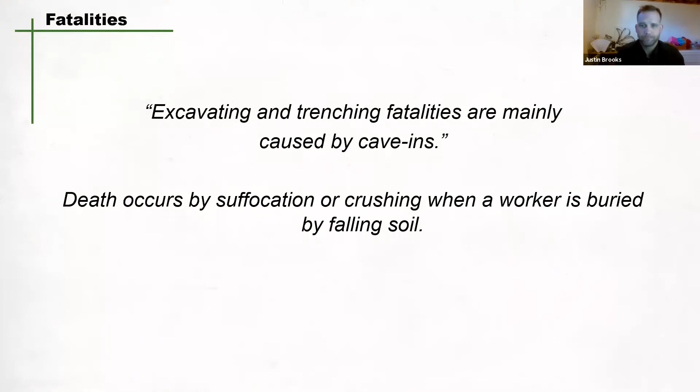Excavating and trenching fatalities are mainly caused by cave-ins. Death occurs by suffocation or crushing when a worker is buried by falling soil. Working around excavations and trenches can be highly hazardous without the proper training or controls in place.

Main causes of lost time injuries on excavating and trenching projects include material falling into the excavation or trench, slips and falls as workers climb on and off equipment, unloading pipe, handling and placing frames and covers for manholes and catch basins, handling and placing pipe and other materials, being struck by moving equipment, falls as workers climb in and out of an excavation or trench, falling over equipment or excavated material, falling into the excavation or trench, and exposure to toxic, irritating, or flammable gases.

So when working around an excavation and trenching, it's very important to plan ahead, always be alert, and to take extra precautions to avoid being faced with one of these situations.

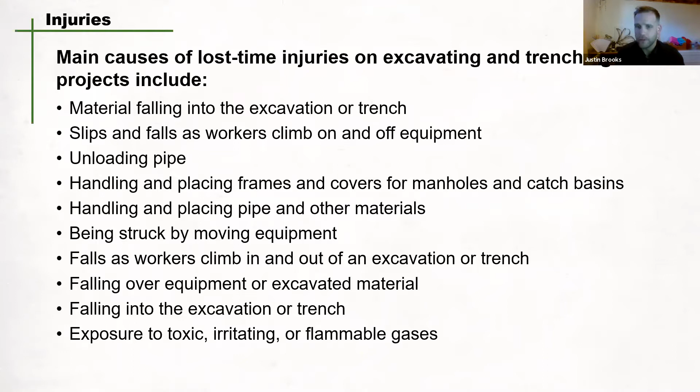When working around excavations and trenches, it's important that you become familiar with the parts of the Act and regulations: excavations, trench, tunnels, and excavated shafts.

Before moving on, let's look at the definitions for excavations and trenches. An excavation is any dugout area of ground other than a trench, tunnel, or excavated shaft.

Working around excavations can be risky as it could result in cave-ins. A trench is an excavation that is deeper than it is wide, and a tunnel is an underground passage with an incline of 45 degrees or less from the horizontal.

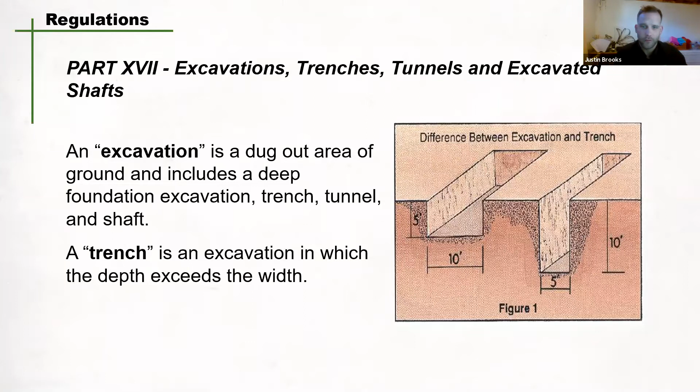Other important regulations you should be familiar with include Section 260, excavations and trenches. This identifies the various types of protection around excavations and trenches. Some forms of protection include shoring, sloping, temporary protective structures, etc.

The OHS division shall be notified as soon as reasonably possible of the intent to dig an excavation, trench, or excavated shaft that is more than 5 meters deep, and that a worker will be required or permitted to enter. That's in Section 7(1)(b). Legislation states that an engineering certificate is required when excavating or trenching using shoring, bracing, and temporary protective structures. It's in Section 261.

Prior to any excavation or trenching, a safe job procedure must be developed and implemented, and all workers must be trained. This is in section 19. We'll go over this at the end, but our next toolbox talk is on developing procedures, so if you're having trouble, contact advisory services and tune into that talk.

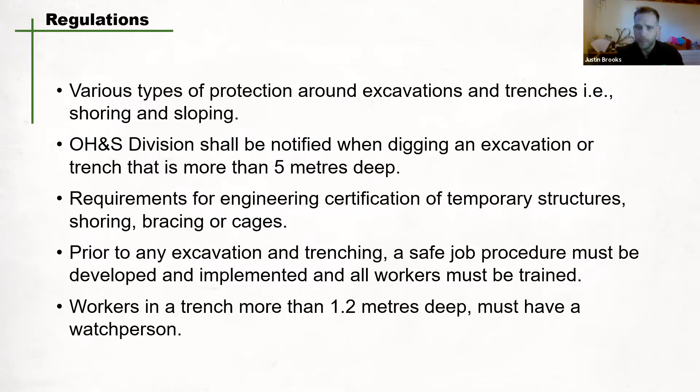Protection against cave-in trenches, subsection 5, indicates where a worker is working in a trench more than 1.2 meters deep, a competent worker must be stationed at the surface to alert the worker in the trench about the development of potential unsafe conditions and to provide assistance in the event of an emergency. This is in section 263.

So let's go over the cause of cave-ins. A cave-in is a collapse of an excavation. When working around excavations and trenches, one of the biggest hazards is risk of cave-ins. An unstable trench or excavation can collapse, resulting in injured workers, or worst case fatalities, caused by suffocation or worker being crushed when buried by soil.

To put this into perspective, 1 cubic yard can weigh as much as a half-ton truck, approximately 2,500 to 4,000 pounds. Soil properties often vary from the top to the bottom and along the length of the trench.

Many factors such as cracks, water, vibration, weather, and previous excavations can affect trench stability, potentially leading to cave-ins. Traffic and equipment working around the excavation or trench can also lead to cave-ins.

Most fatal cave-ins occur on small jobs of short duration, such as service connections and excavations for drains and wells. Too often, people think these jobs are not hazardous enough to require safeguards against a collapse. Unless the walls are solid rock, never enter a trench deeper than 1.2 meters, 4 feet, if it is not properly sloped, shored, or protected by a trench box.

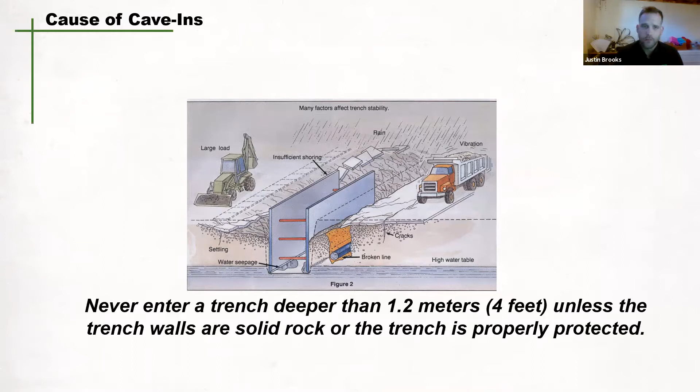Time is also a critical factor when working with excavations and trenches. Some trenches will remain open for a long period, and suddenly collapse for no apparent reason. This figure shows the typical cause of cave-ins.

So the main factors that affect excavation and trench stability are soil type, moisture, vibration, surcharge, previous excavation, existing water, existing foundations, and the weather.

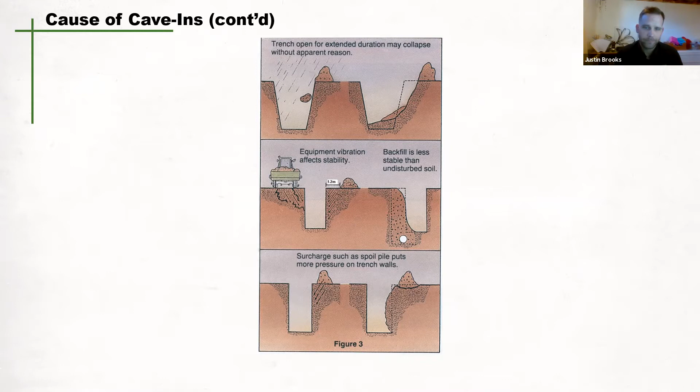Before considering excavating and trenching, you should consider the soil type. Type of soil determines the strength and stability of trench walls. Identifying soil types requires knowledge, skill, and experience. In other words, a competent person shall be responsible for inspecting and identifying the soil.

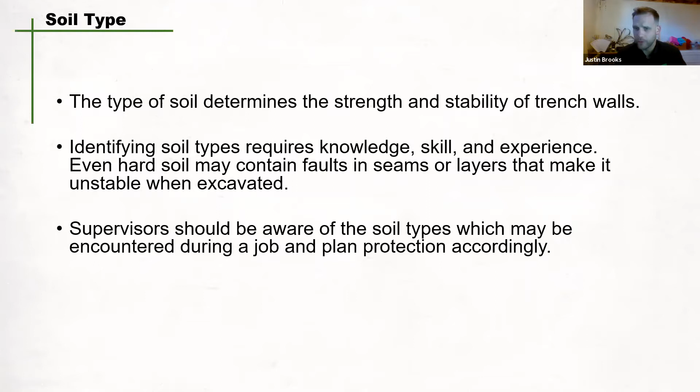This is important because even hard soil may contain faults in seams or layers and make it unstable when excavated. Types of soils are defined under Regulation 257, Section E, F, G, and H, which we will cover shortly. Supervisors should be aware of the soil types which may be encountered during a job and plan protection accordingly.

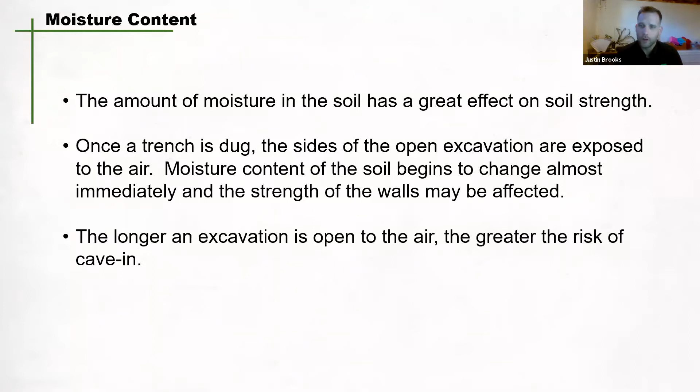The moisture content in soil can have a great effect on the strength of the soil. Once a trench is dug, the sides of the open excavation are exposed to the air. Moisture content of soil begins to change almost immediately, and the strength of the walls may be affected. The longer the excavation is exposed to the air, the greater the risk of cave-ins.

Vibration from various sources can affect excavation and trench stability. Often, excavation and trench walls are subject to vibration from vehicular traffic or from construction operations such as earth moving, compaction, pile driving, and blasting. These can all contribute to the collapse of trench walls.

For anybody that's been around heavy track vehicles or pieces of equipment like excavators, you can feel the vibration in the ground. So that vibration is obviously moving through these trenches and can definitely, without a doubt, cause collapses.

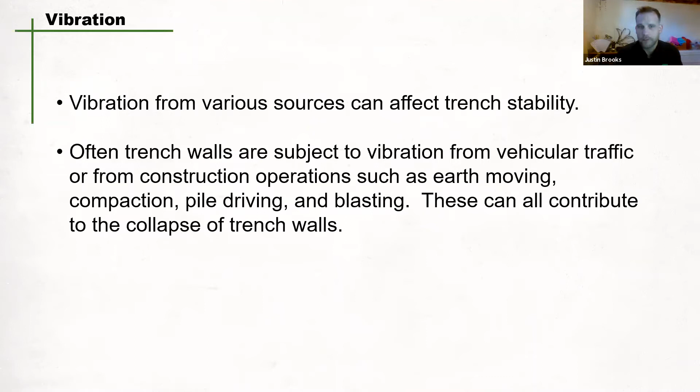A surcharge is an excessive load or weight that can affect the stability of an excavation or trench. For instance, excavated soil piled next to the trench can exert pressure on the walls. Therefore, placement of spoil piles is very important. Spoil piles should be kept as far as practical away from the edge of the excavation or trench.

Mobile equipment and other materials stored close to the trench also add a surcharge that will affect trench stability. Spoil pile is defined by Section 257C of the regs, which states a spoil pile is material excavated from an excavation, trench, tunnel, or excavated shaft.

This brings an important thing to mind: even when setting rings for catch basins, some companies have used skid steers, and skid steers get too close to the trench. So it's important to plan ahead for the type of equipment you use, like, for example, a telehandler or a zoom boom, that can actually bring those rings and drop them over the trench from a distance.

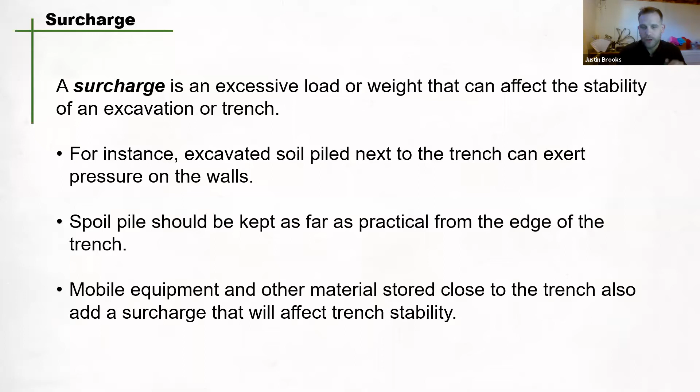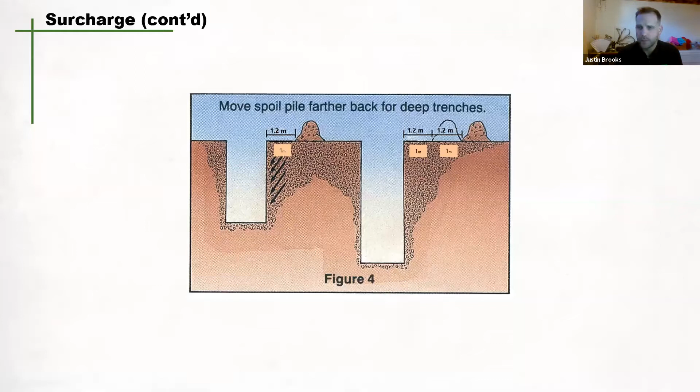In accordance with regulation section 260C, spoil piles should be kept at a minimum of 1 meter, 3 feet, from the edge of an excavation or trench. This also applies to equipment, rocks, and construction material. This distance should be greater for deeper trenches.

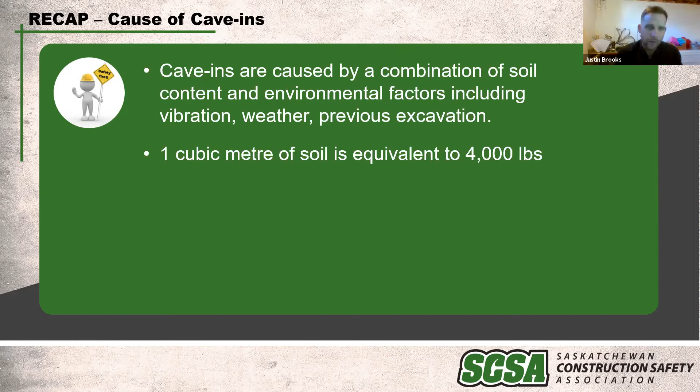So cave-ins are caused by a combination of soil content and environmental factors, including vibration, weather, and previous excavation. 1 cubic meter of soil is equivalent to 4,000 pounds, so that's a good thing to remember and keep in the memory bank of how much this weighs. Spoil piles are material excavated from trenches, tunnels, etc., and spoil piles must be kept at a minimum of 1 meter, 3 feet, from the excavation.

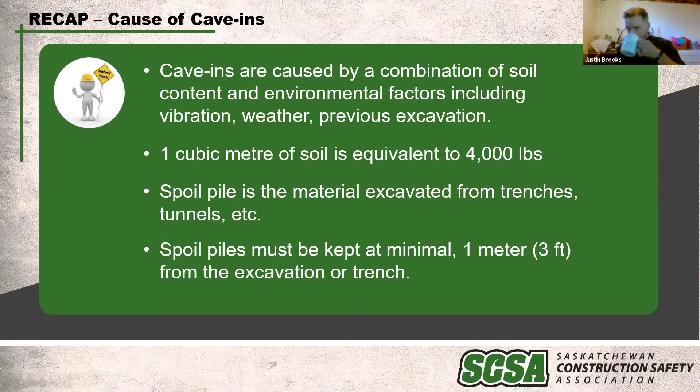All right, so protection against cave-ins. Providing my internet is working great, I've got a video coming up next here from WorkSafe BC. So let's see how this works.

I took a job working in basically golf course construction, something I hadn't dealt with before. Everything I had been doing wasn't related to the construction industry. I moved into a role where I was capable of doing everything from running a shovel to driving a dump truck, running an excavator, running a bulldozer.

We started that morning running a ditch. Everything started off according to plan before coffee break, and we came back from coffee break and went back to work, and within 10 minutes the accident occurred.

We all basically noticed at the same time that one side of the bank looked a little bit unsteady. So I was actually in the process of getting out of the trench. Without even seeing it, the whole wall of the trench just came down.

Because I had my back turned, it basically got me on the back and the side, my right side. And the impact pushed me up against the other side of the trench and pinned me there.

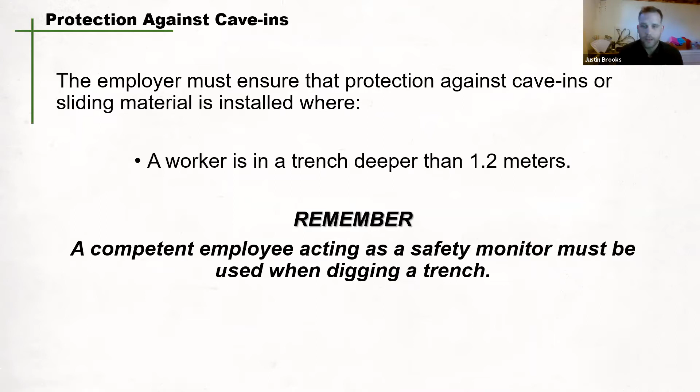In Saskatchewan, there are 3 basic methods of protecting workers against trench cave-ins: cutback, shoring, and temporary protective structures. Sloping technique is used to employ a specific angle of incline to the sides of an excavation to protect against cave-ins. Cutting back the slope of trench walls is a way to protect against cave-ins, basically. The slope angle required may vary depending on soil conditions, so a competent person must determine the correct slope angle for each situation.

Temporary protective structures are a structure or device in an excavation, trench, tunnel, or excavated shaft that is designed by an engineer. The structure provides protection from cave-ins, collapse, and sliding or rolling material. Types of structures include shoring, trench boxes, trench shields, and similar structures. We're going to cover shoring and trench boxes.

Shoring prevents movement of soil, underground utilities, roadways, and foundations. It's a process of bracing the walls of a trench in order to prevent collapse or falling earth into an excavation. Traditional wooden braces, hydraulic rams, or pneumatic rams can be used. An engineer is required to certify that a design of shoring is safe. Shoring for temporary structures must be made of number 1 structural grade spruce lumber.

The OH&S regulations outline shoring procedures that must be followed. Those are within Regulation 262 and Table 17, and we'll show you a little bit of that coming up here. Dimensions for excavation and trench shoring is the title of that.

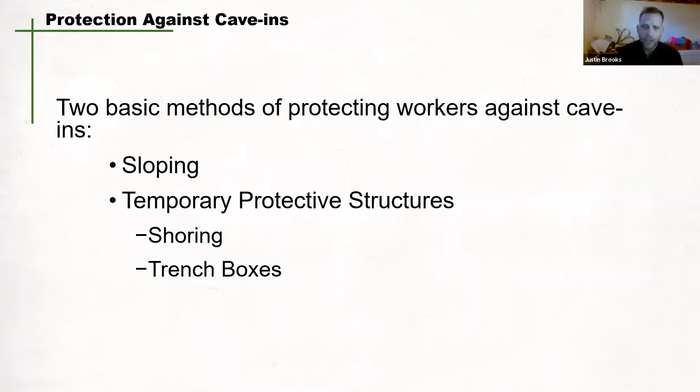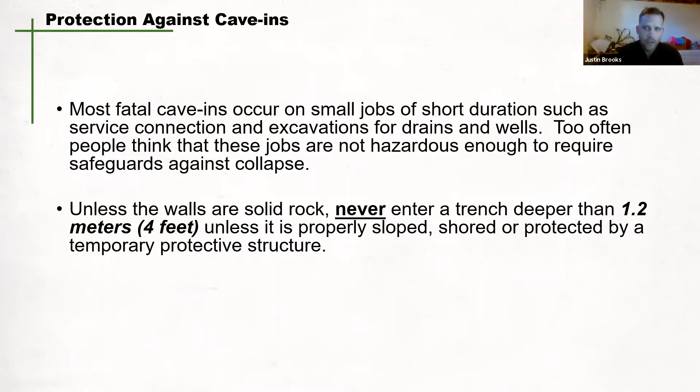Most fatal cave-ins occur on small jobs of short duration. We kind of covered that earlier. Those are usually generally with service connections and excavations for drains and wells. Too often people think that these are not very hazardous and they skip the safeguarding process. So again, unless those walls are solid rock, never enter a trench deeper than 1.2 meters unless it's properly sloped, shored, or protected by a temporary protective structure. That comes up a few times because it's extremely important that it's followed.

One way to ensure that a trench will not collapse is to slope walls. Where space and other requirements permit sloping, the angle of the slope depends on soil conditions. Cut the trench walls back at an angle of 1 to 1, so 45 degrees - that's 1 meter back for every 1 meter up. Walls should be sloped within 1 meter, 3 feet, of the trench bottom.

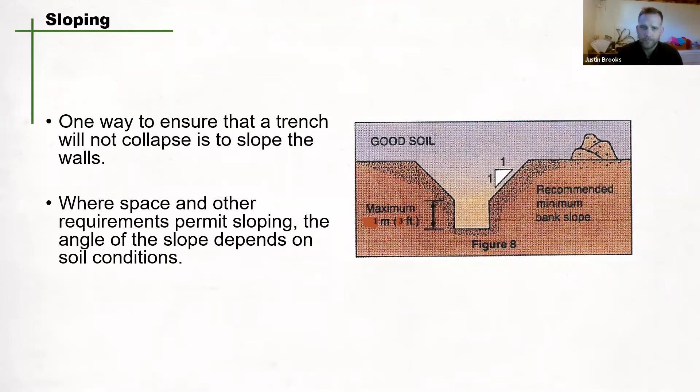The Saskatchewan OH&S regulations identify 4 types of soil, categorized as most closely exhibiting the characteristics within section 257, subsections E, F, G, and H. Type 1 soil is hard in consistency, very dense and compactive condition, can be penetrated but only with difficulty by a small, sharp object. It has a dry appearance, no signs of water seepage, and can be excavated only by mechanical equipment. Type 1 soil does not include previously excavated soils.

Type 2 soil is very stiff in consistency, dense in compactive condition, and can be penetrated with moderate difficulty by small, sharp objects. It has low to medium natural moisture content and a damp appearance after it's excavated. It is difficult to excavate with hand tools, has no signs of water seepage, and does not include previously excavated soils.

Both type 1 and type 2 soil must be sloped within 1.2 meters, 4 feet, of the bottom of the excavation or trench, with a slope angle not steeper than one horizontal to one vertical, at 45 degrees measured from the horizontal. So that's, again, type 1 and type 2 soil.

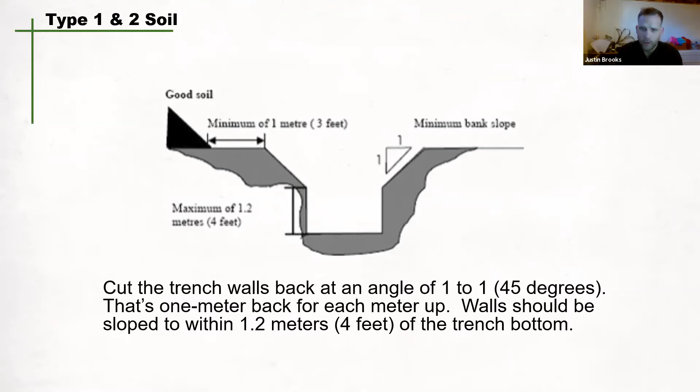Type 3 soil is very stiff in consistency, compact in compactive condition, and can be penetrated with moderate ease by a small, sharp object. It is moderately difficult to excavate with hand tools and exhibits signs of surface cracking. It shows signs of localized water seepage, or is previously excavated soil that does not exhibit any of the characteristics of type 4 soil. This type of soil must be sloped from the bottom of the excavation or trench at an angle not steeper than one horizontal to one vertical, or 45 degrees measured from the horizontal.

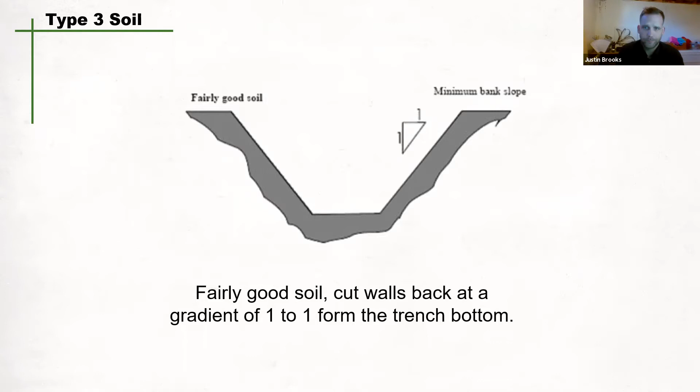Type 4 soil is soil that has been either previously excavated or is undisturbed soil that has any of the following characteristics. It's very soft in consistency, loose to very loose in compactive condition, and is easy to excavate with hand tools. It's a cohesive soil that is sensitive and, on disturbance, is significantly reduced in internal strength and is dry and runs easily into a well-defined conical pile.

It has a wet appearance and runs easily or flows, and is granular soil below the water table unless the soil has been dewatered. This type of soil must be sloped from the bottom of the excavation or trench with a slope at an angle not steeper than 3 horizontal to 1 vertical, or 19 degrees measured from the horizontal. This again is within section 262C.

Where the soil is identified as consisting of more than one soil type, the soil will be classified as a soil type with the higher number. So, for clarification, if it was type 2 and then you found out as well soil type 3, it would be classified completely across the board as a soil type 3.

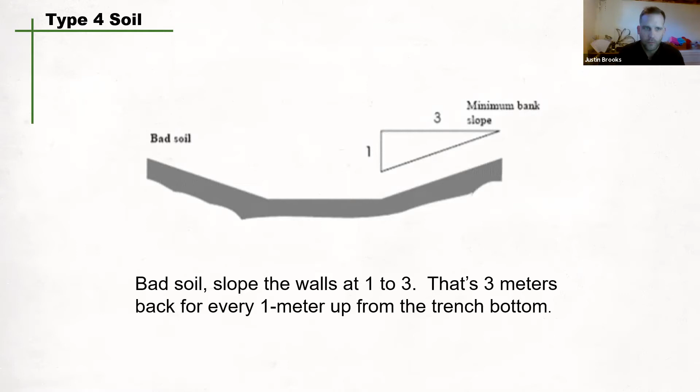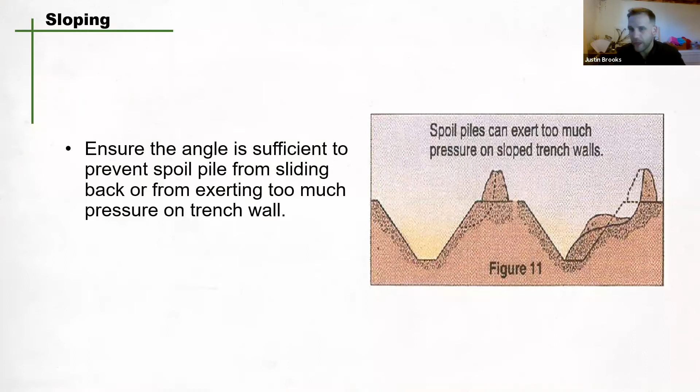Although sloping can reduce the risk of cave-ins, the angle must be sufficient to prevent spoil not only from sliding back, but from exerting too much pressure on the trench wall.

Sloping is commonly used with shoring or temporary protective structures, or trench boxes, to cut back any soil above the protection zone. It's also good practice to cut a bench at the top of the shoring or trench when the depth of the excavation below the slope sides exceeds 1 meter, 3 feet. The support structure should extend 2 feet above the bottom of the slope sides to prevent any material from falling into the excavation. This is within regulation 262(1)C.

So as you can see in the picture, how they cut the bench in from the top of where the shoring is, and that shoring extended above, right? So this can also save material doing this bench cut above the trench, right? Because now if you have to go by regulations 2 feet above the bottom of the slope sides, you're saving material because you've had to dig that bench out as well. So it's also good for the pocketbook, I guess, this regulation.

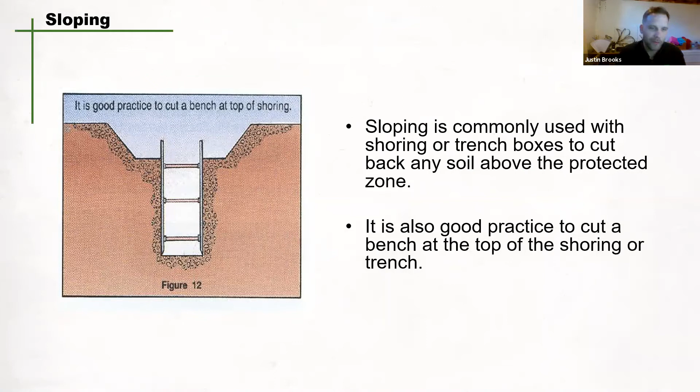Where sloping is to be used above the temporary protective structure or trench box, the box portion of the cut should be first sloped at a 1-to-1 ratio. Then the box should be lowered into the trench.

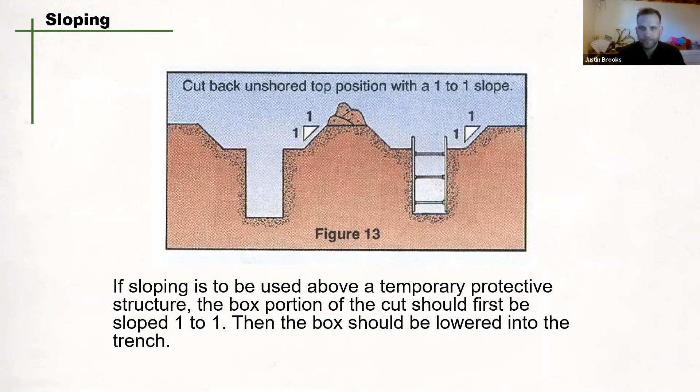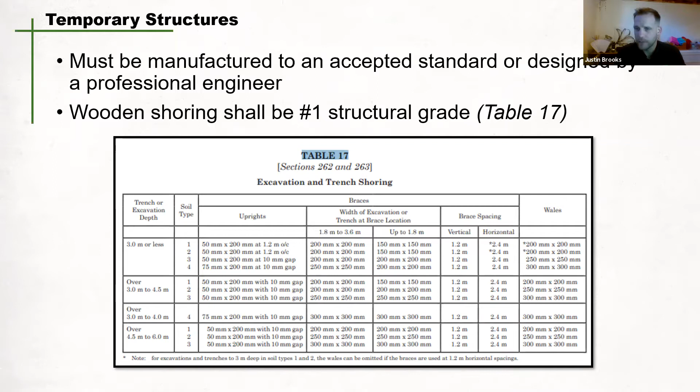Wooden shoring shall be number 1 structural grade spruce or equivalent and installed as set out in table 17 of the OH&S regulations appendix.

Temporary protective structures such as trench boxes are not usually intended to shore up or otherwise support trench walls. They're meant to protect workers in case of cave-ins. They are capable of supporting trench walls if the space between the box and the trench wall is backfilled. The protective structure should exceed at least 300 millimeters, so that's 1 foot, above the excavation. That's also located in regulation 262(1)C.

Trench boxes are normally placed in an excavated but unshored trench and used to protect personnel. A properly designed structure is capable of withstanding the maximum lateral load expected at a given depth in a particular soil condition. Trench boxes are commonly used in open areas. Trenches near utilities, streets, and buildings may require a shoring system.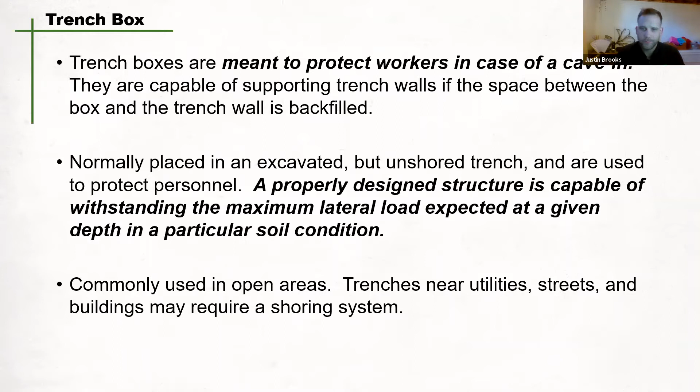As mentioned earlier, trench boxes primarily protect workers from cave-ins and similar situations. They act as a shield and are commonly used in open areas away from utilities, roadways, and foundations. Designed by an engineer, they protect workers from cave-ins, collapse, and sliding or rolling material.

Excavation should be done so that the space between the trench box and the excavation is minimized. This may require some backfilling. Two reasons for this are allowing closer access to the top of the box, and limiting soil movements in case of a cave-in.

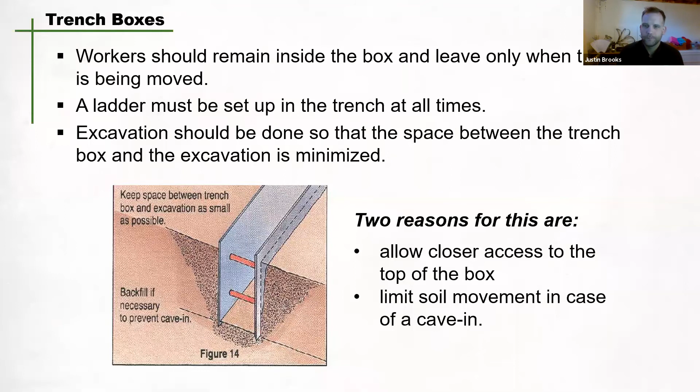Shoring is a system which shores up or supports a trench wall to prevent movement of soil, underground utilities, roadways, and foundations. Shoring should not be confused with trench boxes. A trench box provides worker safety but gives little to no support to the trench walls or existing structures such as foundations and manholes. The two types of shoring most commonly used are timber and hydraulic.

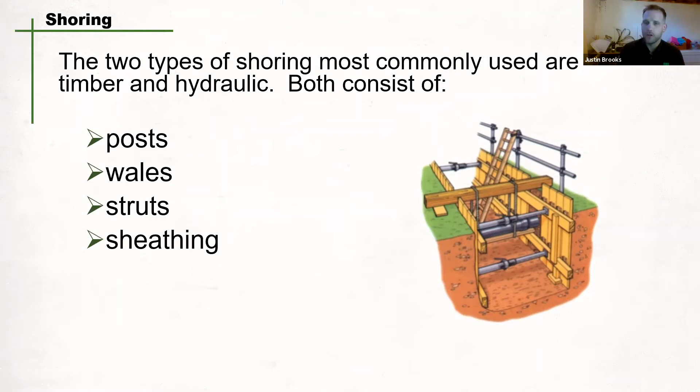As these pieces go together, your sheathing is actually up against the excavated area. Your walers go across to help spread the load placed by the struts, or cross braces, that are pushing against each side of the trench wall. This would be on both sides of the trench wall, as seen in some of the previous photos. It's really important that they follow all regulations set out, and that they're placed securely but also in a manner that allows workers to move safely in between.

The reason it's so important to make sure these are secured is because workers will be working in that area, and the last thing you need is someone bumping one of the struts. I hope nobody decides to sit and eat their lunch in an excavation. Definitely don't use the struts or walers to step up - that's why you have your ladders. They shouldn't be sat on, have material placed on them, or anything, because they are holding weight when required.

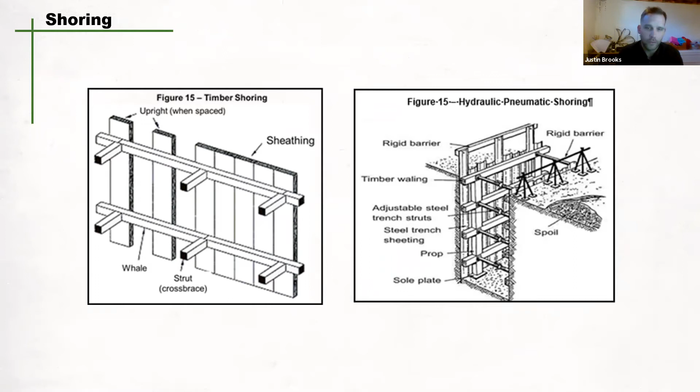Timber sheet supported with the help of timber posts - this is a basic type of temporary shoring used. This is just a basic up close view, so you get a good idea of what it looks like and how it's laid out.

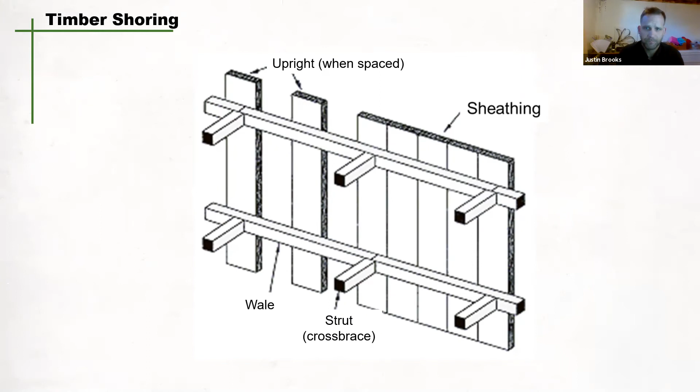Hydraulic shoring includes the use of prefabricated strut and wale systems manufactured of aluminum or steel. Strictly speaking, these may not operate hydraulically - some are air operated or manually jacked. One major advantage of hydraulic shoring over some applications of timber shoring is safety during installation. Workers don't have to enter the trench to install the system; installation can be done from the top of the trench. These are really handy - they're not cheap, but they are extremely handy. If you've ever had the chance to see them operate, they're amazing.

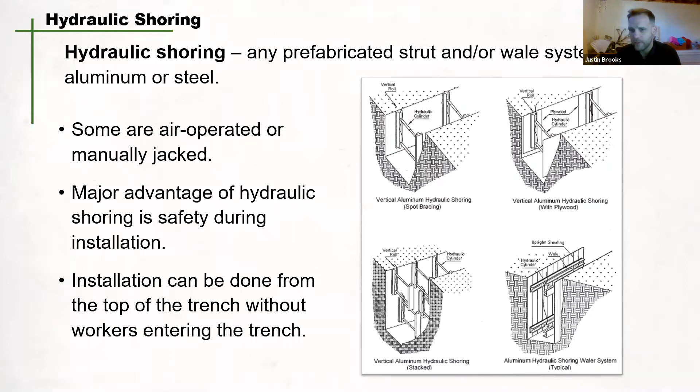Other advantages of most hydraulic systems are that they're light enough to be installed by one worker, are gauge regulated to ensure even distribution of pressure along the trench line. They can have their trench faces preloaded to use the soil's natural cohesion to prevent movement, and can be adapted easily to various trench depths and widths. Hydraulic shoring should be checked at least once per shift for leaking hoses and/or cylinders, broken connections, bent bases, or any damaged or defective part.

Another form of shoring is pneumatic shoring, which is very similar to hydraulic shoring. The primary difference is that pneumatic shoring uses air pressure in place of hydraulic pressure. A disadvantage of using pneumatic shoring is that the air compressor must be available on site.

I'll just give you a second to take a look at how this is put together - very similar to the last pictures. It's just that your struts have been changed out for pneumatic or hydraulic jacks. There are different plates that go with it, like the sole plate you can see here. But it's very, very similar - it's just all prefabricated.

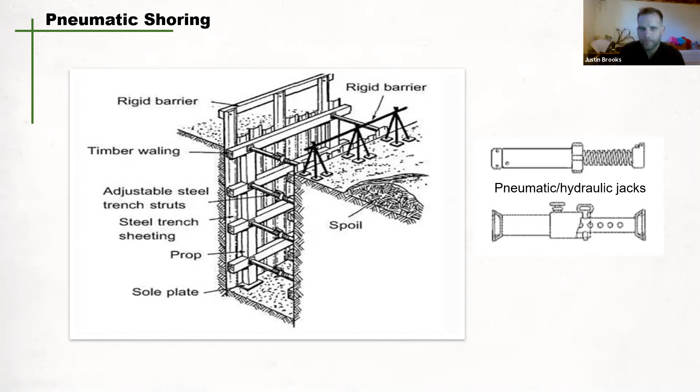Most hydraulic systems are light enough to be installed by one worker, gauge regulated to ensure the even distribution of pressure along the trench line, and easily adapted to suit various trench depths and widths. Whenever possible, shoring should be installed as excavation proceeds. If there's a delay between digging and shoring, no one must be allowed to enter the unprotected trench. All shoring should be installed from the top down and removed from the bottom up.

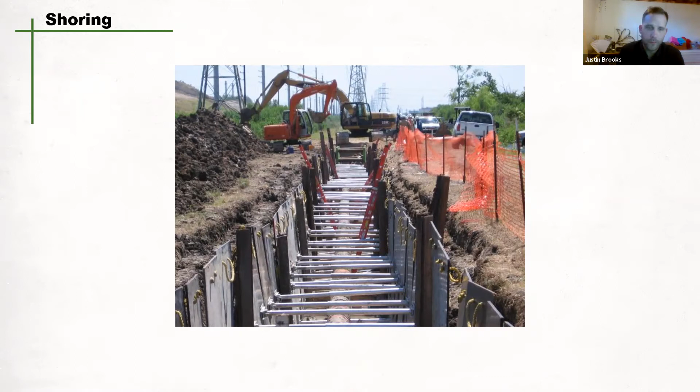Whether protected by sloping, boxes, or shoring, where workers are required to enter and work in a trench, there must be a safe means of entry and exit within close proximity. In accordance with legislation, section 2636, entry and exit must be within 8 meters, 26 feet, of the worker. Entries and exits include ladders, stairways, and sloped ramps. When using a ladder to prevent slipping, the ladder should be placed within the shored area and tied off.

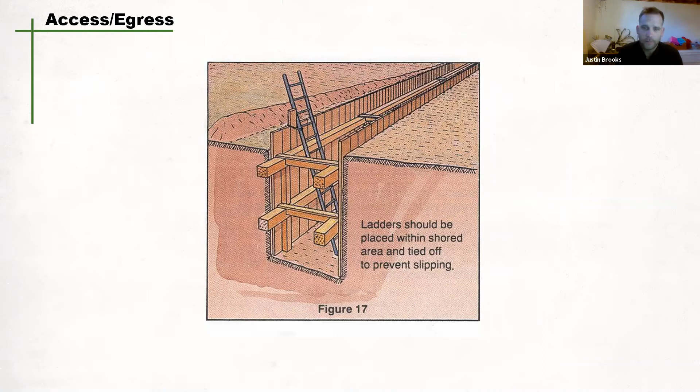Place ladders within the area protected by the shoring or trench box. They should be securely tied off at the top, extended above the shoring box by at least 1 meter, 3 feet, and inspected regularly for damage. For more information on inspecting a ladder, get in contact with an advisor to talk more about our ladder demonstration, which we can conduct over all our mediums, such as Zoom or Teams or anything like that.

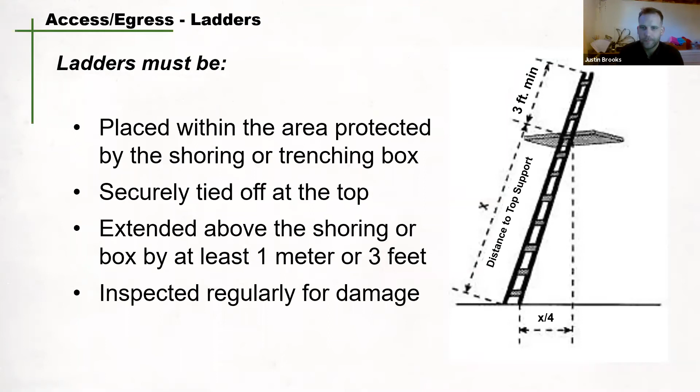In Regulation 2636AB, protection against cave-ins of trenches, safe entries and exits from a trench are very important. Ladders, stairways, or ramps should be placed no further than 8 meters from a worker in a trench deeper than 1.2 meters. Anyone climbing up or down must face the ladder and maintain 3-point contact.

Maintaining 3-point contact means hands must be free for climbing. Tools and materials should not be carried up or down ladders.

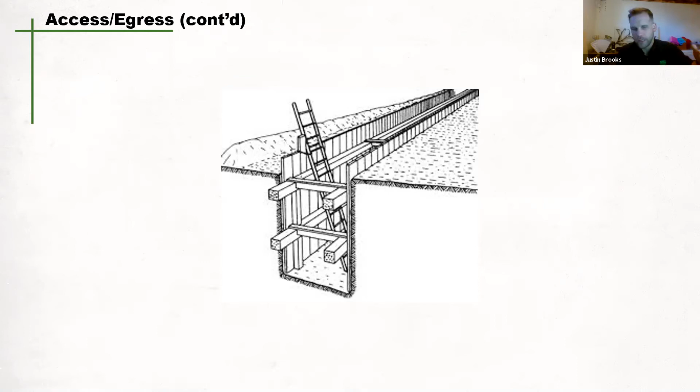Pumps, small compactors, and other equipment should be lifted and lowered by methods that prevent injury from overexertion and falling objects. This is why it's great to have a telehandler on site when it's available. If you have compactors to bring into the bottom of the trench, you can simply boom out, put your outriggers down, and using a nice long sling, drop it safely into the trench.

When it comes to inspection, remember that it's everybody's responsibility. Whether the protective system used should be inspected regularly. Check hydraulic shoring for leaks in hoses and cylinders, bent bases, broken or cracked nipples, or other damaged or defective parts.

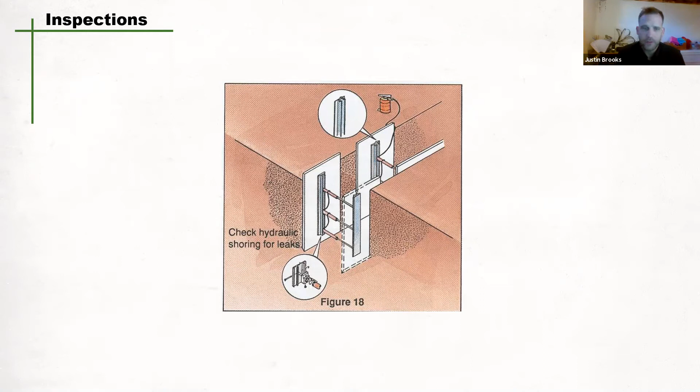Make sure that you're checking timber shoring prior to installation, like checking the actual timber itself too. Discard damaged or defective lumber. After installation, inspect wales for signs of crushing. Crushing indicates structural inadequacy and calls for more struts.

You can see in this picture how they've secured this with some strapping, like a 1x4 or 1x6, nailed to your wales from your struts. That's a great way, instead of just toe nailing, where you're just nailing through the sides of it. That's a much better way for doing it.

I've seen people that use brackets. They use 2 L brackets on the side and then 1 flat bracket on top to make sure it's secure properly and it's not going to move anywhere.

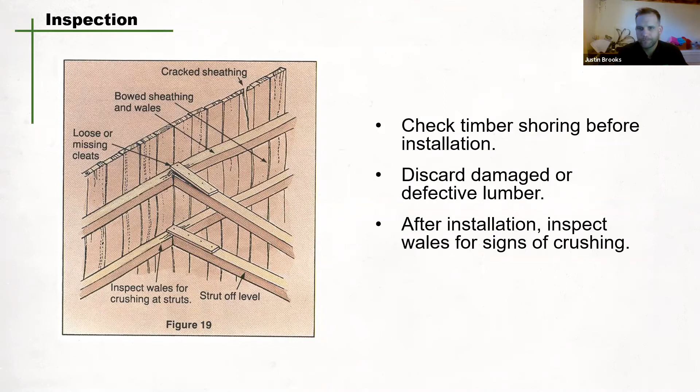These boxes should be inspected for structural damage, cracks in welds, and other defects. During use, check the box regularly and often to make sure that it is not shifting or settling much more on one side than the other. If it is, workers must leave the trench and ask the supervisor to check stability.

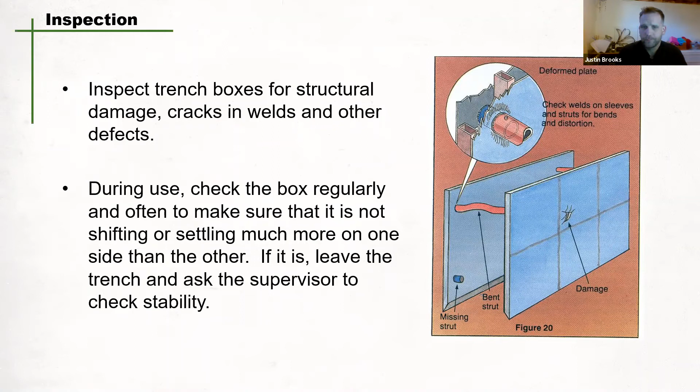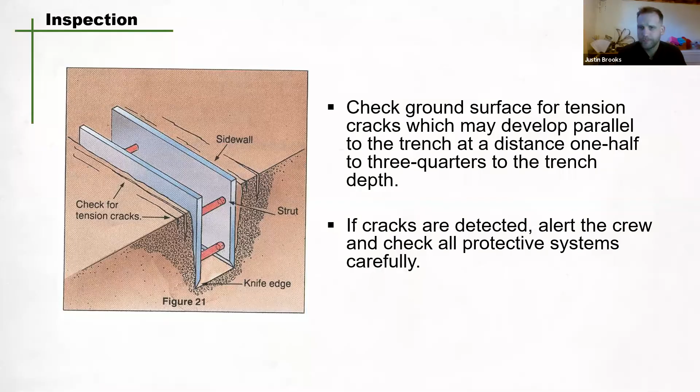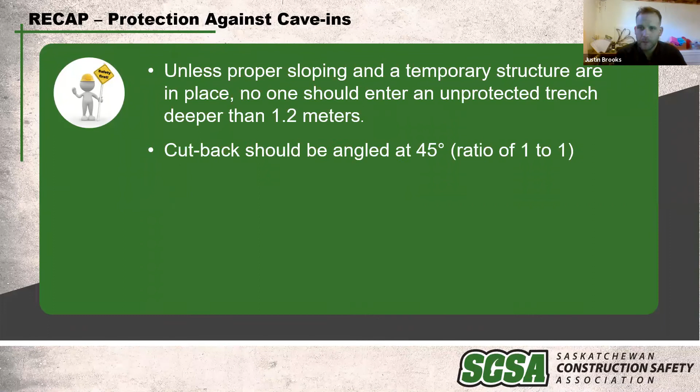So just a quick recap on protection against cave-ins. Unless proper sloping and temporary structures are in place, no one should enter an unprotected trench deeper than 1.2 meters. Cutback should be angled at 45 degrees, ratio 1:1. Type 4 soil is the least stable soil, and it is easy to excavate with hand tools and may have previously been excavated.

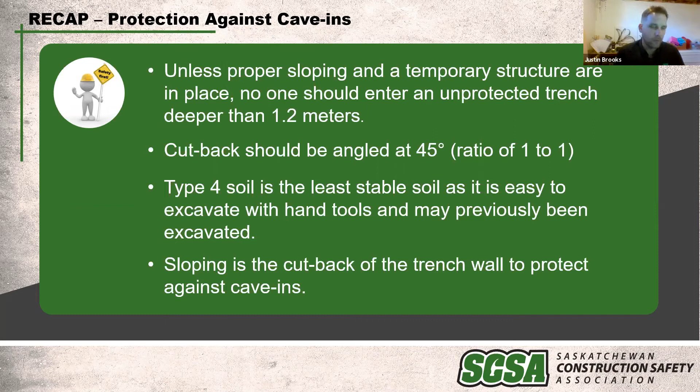Sloping is the cutback of the trench wall to protect against cave-ins. Keep in mind, type 4 soil is the soil that requires a different cutback. So, other hazards and safeguards.

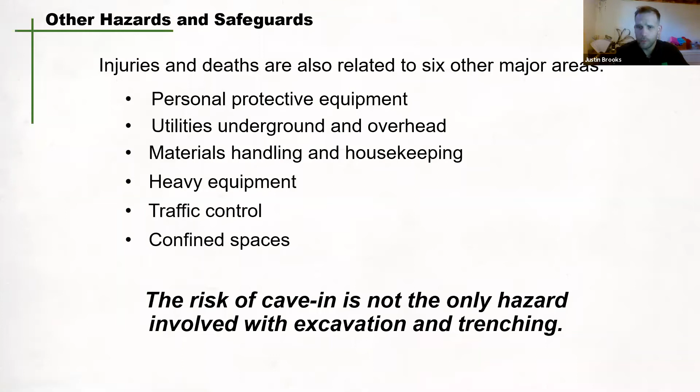Working around excavation and trenching also requires consideration of the following: PPE, personal protective equipment, utilities underground and overhead, materials handling and housekeeping, heavy equipment, traffic control, confined spaces. Injuries and deaths have resulted in the failure to acknowledge or recognize the importance behind pre-planning to ensure these major areas are accounted for. We'll be focusing on PPE and utilities, underground and overhead, today.

Wearing high visibility safety apparel, so vests, protects workers who are exposed to the risk of injury from moving equipment or environmental conditions so they don't blend in with the surroundings. It's extremely easy when everybody's wearing brown Carhartts and Carhartt long sleeves and toques and stuff like that. When you're on a job, it's very easy for them to blend in.

Eye protection is strongly recommended to prevent injuries from construction operations such as chipping and drilling, and site conditions such as dust. OH&S Regulation 93, eye and face protectors. Personnel exposed for long periods to noisy equipment should be wearing hearing protection. This is found in OH&S Regulation Section 99, exposure to noise.

Work in confined space, such as manholes and valve chambers, may require respiratory protection against hazardous atmospheres. This is located within Section 88, 89, and 90.

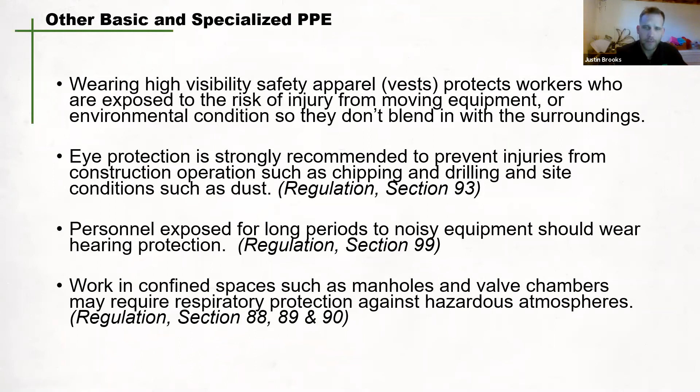Saskatchewan legislation requires employers and contractors to inform workers where, when, and why they're required to use PPE. Provide workers with appropriate and properly fitted PPE at no cost, excluding specialized footwear. Train workers in the use, care, maintenance, and limitations of their personal protective equipment.

Workers provided with personal protective equipment must use proper fitting PPE appropriate to the job. Inspect and test PPE before each use. Care for and maintain PPE and report deficient or malfunctioning personal protective equipment.

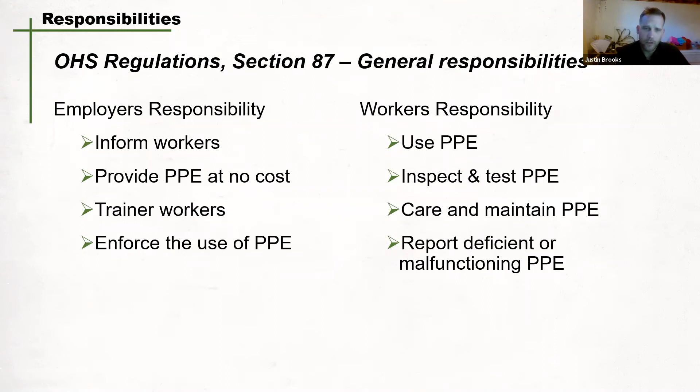So let's go over a couple of things before you start digging.

Prior to starting a project, you must first notify Sask 1st Call for services such as gas, electrical, telephone, and water lines. Those must be located by the utility provider before excavation begins. Sask 1st Call provides free services for anyone planning to dig or excavate. They provide underground facility screening and locate by marking underground services with labels, stakes, flags, or paint. This method is used to indicate the center line of an underground service and provide a diagram of locate information.

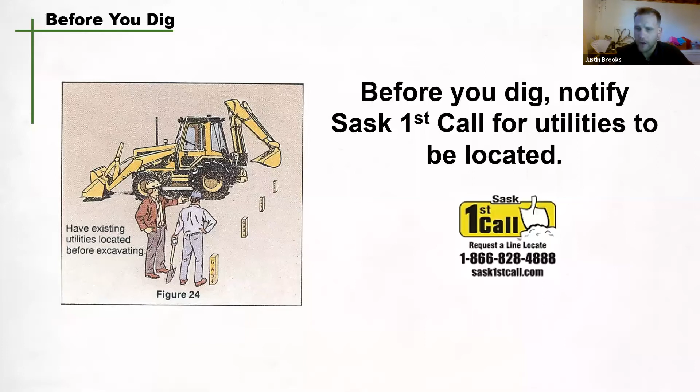Line locate requests can be submitted 24 hours a day, 7 days a week. Requests for line locates must be made a minimum of 2 full working days, excluding the day the request is submitted, prior to the beginning of the project. When making the call, be prepared to provide city, town, or project location, your address, 2 intersecting street names for urban locations, the type of work being done, and the start date.

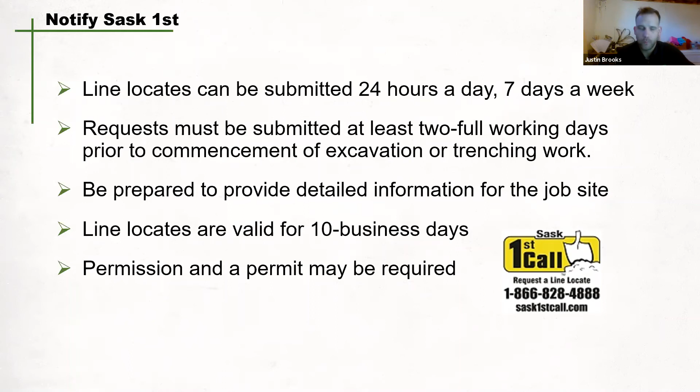You'll receive a notification when lines are marked and it's safe to start your project. Keep in mind that line locates are only valid for 10 business days. If the project is delayed or past the 10-day period, call Sask First again to have the lines marked one more time. In some cases, the lines must be supported. If the contract does not specify the method of support, you must contact the utility provider for the requirements.

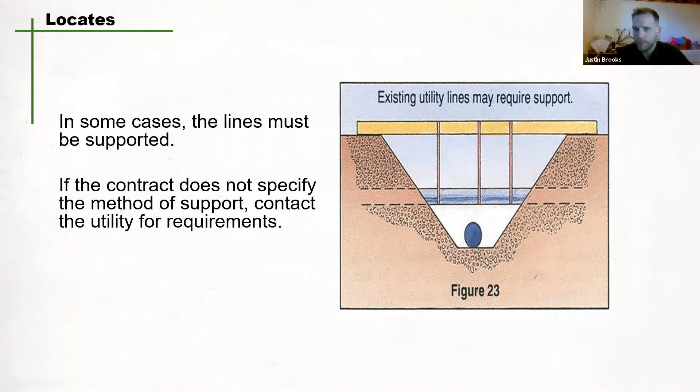After being located and marked by the utility provider, services should be exposed first by hand digging, then by excavating equipment. Procedures are outlined in OH&S regulations under Section 259, locating underground pipelines.

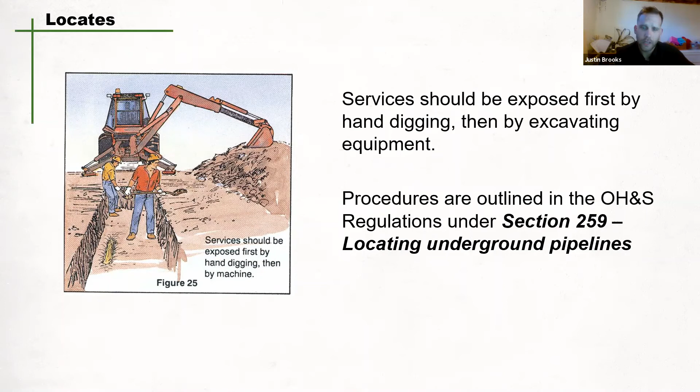The first thing that goes through your head, obviously, when that happens, is you hope that everybody was okay and that nobody was hurt. You think about the impacts that could have had on their friends and family. The report was that when they made contact with the utility, some fire did come out of the hole, so that's obviously scary. Once you learn that everybody is okay, you start to think about the next impacts. So work with the contractor, work with everybody to get power back on and make sure that everybody's safe.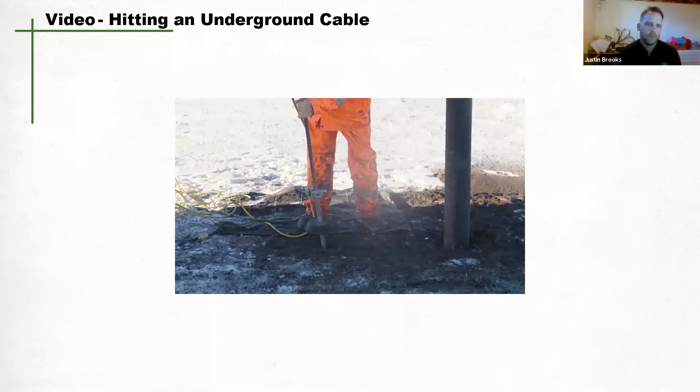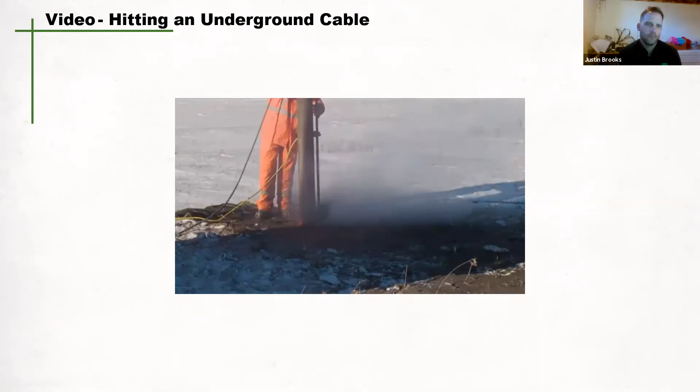So in this case, pressures during hydro excavation operations were too high for this type of utility, and the sweeping motion of the hydrovac wand itself wasn't correct for this type of operation. As well, the access hole wasn't large enough to even accommodate a proper sweeping motion.

A lot of times, especially with older cable, the outside jacket is buried underground for a long time. Like on this cable, probably over 30 years. So they get really soft and aren't able to handle as much pressure as new cable.

We're not here to assign blame. We're here to learn and to try and prevent these incidents from occurring in the future.

I think there would have been in the area of 1,000 to 2,000 people that may have been impacted. A couple primary care facilities, some retirement homes in the area, and there's an ambulance dispatch center around here. It certainly impacts the traffic, and if there was an ambulance that needed to go out at that time, I think that would have been a huge impact to them.

I really hope that when you're out doing your job, safety is the primary concern. If you don't know something, it's okay to stop and ask. These utility owners know details about that specific utility that you may not.

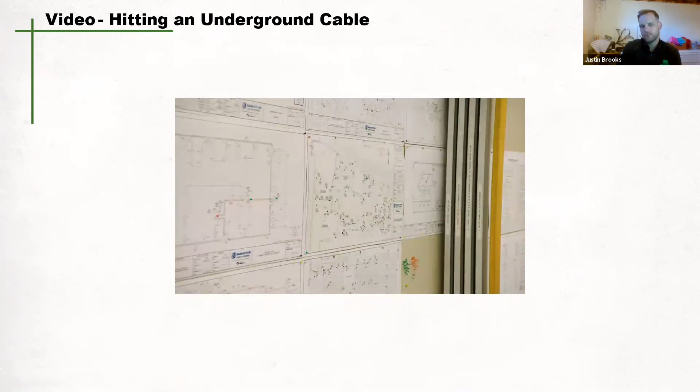If a company or contractor did damage the line, then they would often incur the direct cost for repairing the line, and there's oftentimes indirect costs as well. We don't want anybody to get hurt or worse, and working around these high-risk utilities is dangerous, and we want to make sure that everybody gets home at the end of the day.

In Saskatchewan, maximum fines for incidents causing serious injury or death are $500,000 for an individual and $1.5 million for a corporation, the highest in Canada.

So a line break or hit could lead to lengthy service outages, equipment damages, costs to respond and repair lines to restore services affected. These expenses alone can be costly, adding up to thousands of dollars, and could lead to fines and legal action. Worst case, a line break or hit could lead to an injury or death.

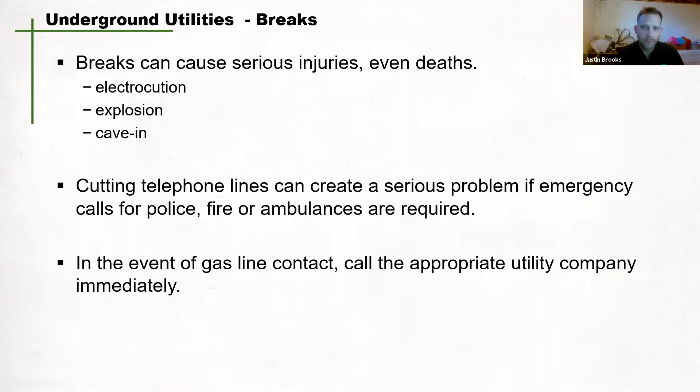So ensure that cutting telephone lines can create a serious problem if emergency calls for police, fire, or ambulance are required. In the event of a gas line contact, call the appropriate utility company immediately. More often than not, almost all of them, I would say, though I can't be quite certain, have a 24-hour emergency line. So use that emergency line if required.

When you have a line break, it's important to make sure that you evacuate the area. People in the immediate area should be told to evacuate. Where service to a building or home has been struck, people inside should be advised to leave doors and windows open, shut off appliances, furnaces, and other sources of ignition, and vacate the premises until the gas company declares it safe to return.

Construction personnel should take two precautions: leave the trench immediately, since gas can collect in those low trenches, and put out smoking material and shut off other sources of ignition such as engines and equipment.

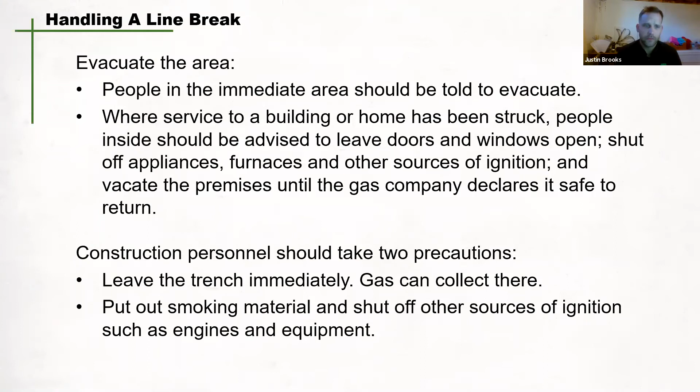When it comes to overhead power lines, equipment such as excavators or backhoes must not be within 3 meters of an overhead power line unless a signal person is stationed to warn the operator when any part of the machine, boom, or load approaches a minimum distance specified in the regulations. SaskPower, SaskEnergy, or City Utilities must be notified prior to working on an overhead power line, or Sask 1st Call must be contacted and notified prior to working on an overhead power line.

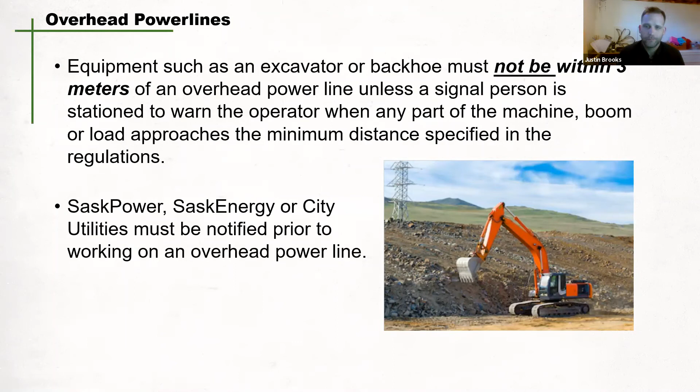If equipment touches a high voltage line, the operator should take the following precautions: stay on the machine, don't touch equipment and the ground at the same time. Touching anything in contact with the ground could be fatal. Keep others away, and warn them not to touch the load lines, boom, bucket, or any part of the equipment.

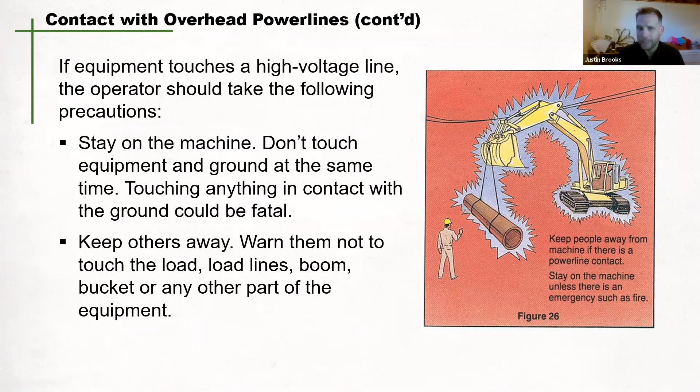Should you run into an instance where the equipment touches a power line, call the local utility to shut off the power immediately. If possible, break contact by moving the machine clear of the wires. Otherwise, do not move the machine until the utility shuts down the line and confirms the power is off.

If an emergency such as fire forces you to leave the machine, jump clear. Never step down. If part of your body contacts the ground while another part touches the machine, current will travel through you.

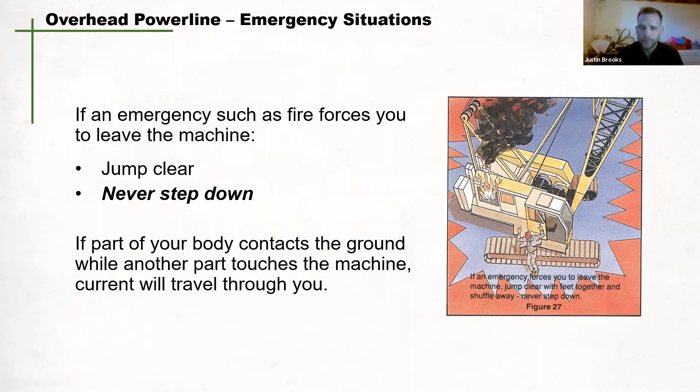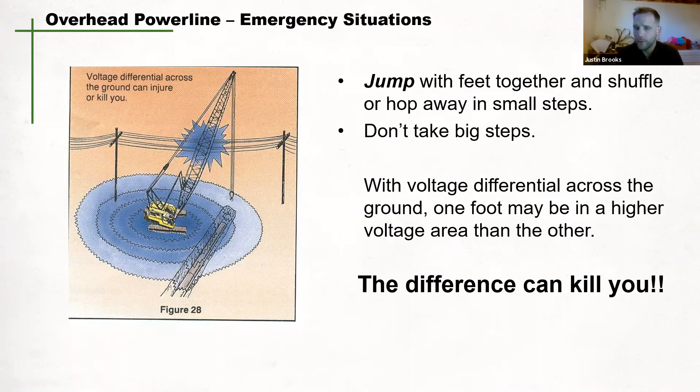Jump with the feet together and shuffle or hop away in small steps. Don't take big steps. With voltage differential across the ground, one foot might be in a higher voltage area than the other. The difference can literally kill you.

Special precautions are required for casualties in contact with live power lines. Never touch the casualty or anything in contact with the casualty. If possible, break contact using a dry board, rubber hose, or dry polypropylene rope to move either the casualty or the line. An object can sometimes be thrown to separate the casualty from the wire. Call emergency services—in most cases, ambulance, fire department, and utility.

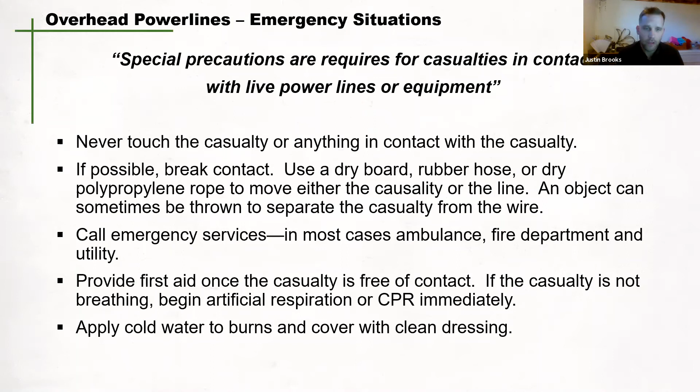Provide first aid once the casualty is free of contact. If the casualty is not breathing, begin artificial respiration immediately, or CPR. Apply cold water to burns and cover with a clean dressing. The real deal is that you should have, and by law, someone with first aid training who knows all these steps.

So far for this section, we've reviewed PPE, utility locates, underground and overhead utilities, and how to respond to emergency situations. Use appropriate and properly fitting personal protective equipment. Notify Sask 1st Call before digging. If a leak is identified or suspected, contact the utility company immediately. When working around overhead power lines, equipment must not be within 3 meters. In the event of contact with an overhead power line, stay calm. You may be required to contact utility services to disconnect. In highly hazardous situations, call 911.

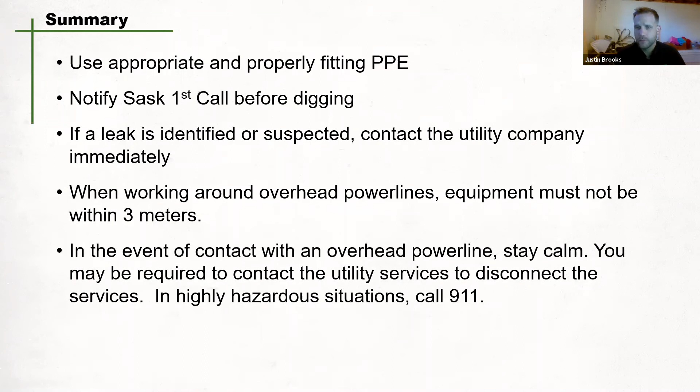Perfect. Okay, so now that that has all been handled, we have some questions that were brought to the advising staff prior here. So I wanted to just bring these up to our panel here and talk about them a little more. One of the questions, and this is actually a good one because it wasn't covered at all in the presentation, is—Joanne, I'll send this one your way: Can an excavation and a trench be on the same site as part of the exact same dig?

Yeah, it can. Oftentimes you'll find that you actually have an excavation, whether it be commercial or for a house, and what's going to happen is they're actually going to have a trench in the bottom of that excavation for maybe some underground plumbing, wiring, and so forth. You want to make sure that you actually use proper precautions again against cave-ins, and trench boxes as well are going to be handy in this situation, but you'll also find that, like I said, they're going to be used together.

Awesome. Yeah, absolutely. And this is something that you see quite a bit in commercial construction, but every once in a while you see it in residential. I didn't have a whole lot of residential experience, but I've seen it a lot in commercial.